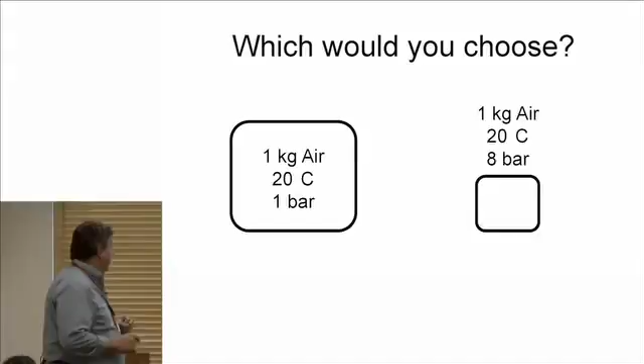As a way to start, maybe we'll start out with a question. Which resource would you choose? I'll give you two choices, two tanks. Big tank, it's got 1 kilogram of air, it's at 1 bar, it's at 20 degrees C. Or a tank where I halve all the dimensions, 2 cubed is 8, so it's at 8 bar, it's got the same mass of air, it's at 20 degrees C, but higher pressure. Which is a more valuable energy resource?

Oh, I love that, hold that thought. Before that, I'll give you a hint: they both have exactly the same amount of energy. Air under those conditions is an ideal gas, and the internal energy is a function of temperature only, so they have the same energy inside both.

Which would you rather have given where you are? The 8 bar, you'd rather have the 8 bar. Why would you rather have the 8 bar? I live in a 1 bar environment, so I can utilize the difference. Well, how would you utilize it?

Take the air and run it through a turbine. Yeah, that would be a great way to do this. What if you live in an 8 bar environment? Take the 1 bar, what would you do with it? Same thing, went the other direction.

You're banned from answering questions. Okay, all right, okay, we're fine.

I'm going to take the 1 bar tank and change it to methane. Which would you rather have? Where's my bar? You live here.

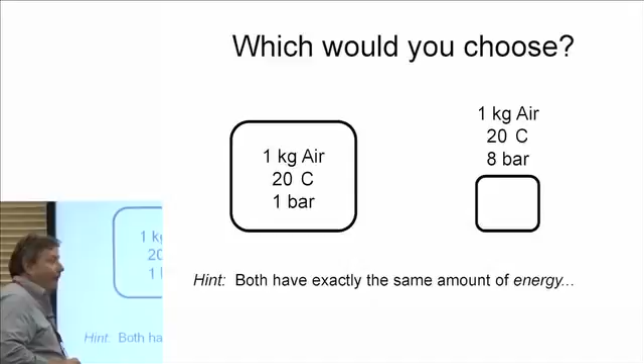Take the methane. I'm going to take the methane and start diluting it with air. I'm going to keep diluting it with air. All right, forget that one. I'll put the methane inside that tank.

We've got the 8 bar environment. I'm going to change the environment to a planet that's at 8 bar, and the environment's made out of methane. Which would you rather have? You'd rather have the air back at the 1 bar.

Okay, so there's a couple of things. Your point, you took my thunder right from the beginning—not that it's great thunder. The ability to get work from a resource depends upon the resource and the surroundings that it's in, right? So the idea that you probably got somewhere along in high school that energy is the ability to do work is just not correct. That's not what energy is. That's actually what exergy is, right? And it's a property both of the resource and the surroundings in which you sit.

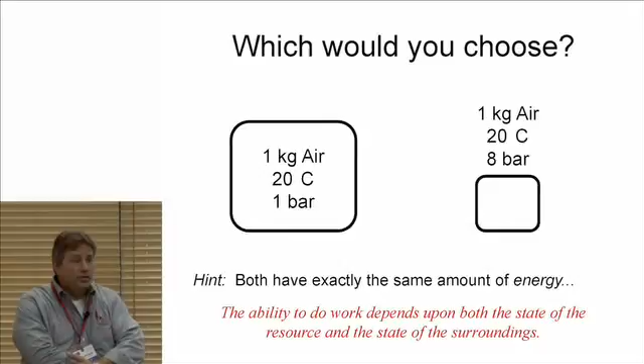Not too surprising. Okay, Richard, were you looking at my slides? Okay, so I've been preempted on this thing, but I'm going to give you a few definitions. In terms of assumptions, I'm going to assume that you know thermo, or that you had it once upon a time. This is a tutorial, and it's a tutorial on exergy, so I'm going to show you how to derive this stuff, and we'll knock a little rust off as we go.

So first, energy is not the ability to do work. Energy is actually a tricky thing to define. Everybody thinks they know what energy is, but if it's not the ability to do work, what exactly is it? You look in a thermo book, you won't find it defined. You go to a high school book, it's defined as the ability to do work—that's wrong. If you look at a college level book, it will say something about the ability to cause change in the world. I mean, it's wonderful and aspirational, and I love the definition. On the other hand, I hate it because it's completely non-technical, so you can't really do anything with it.

So the best definition I can give you: it's the extensive conserved quantity that is interconvertible with heat and work. Now that's a little dry, I know. And you might say, well geez, how do you separate energy from the first law, which is the conservation principle? And the answer is it's not separable.

Work was defined long before energy, in terms of Newtonian mechanics. Heat transfer was defined long before energy was. And it wasn't until Joule came along and said, hey, what about this equivalence between heat and work? And he still didn't quite have his finger on the fact that there was a conserved quantity, and there was a very distinct sign between the two in terms of work could go to heat. Heat could not completely go to work. But there was something in between there that was storable. And so separating the storage from the transfers was tricky.

Well, if that's energy, how about entropy? Entropy is the extensive measure of the number of microscopic rearrangements of energy. S equals K log omega. What on earth does that mean? I have a system, it has a certain amount of energy. If I can go in with that and microscopically rearrange it in omega possible configurations, the logarithm of omega multiplied by Boltzmann's constant—a little 0 point thing that hangs out on the side, don't worry about that—from it, is the entropy.

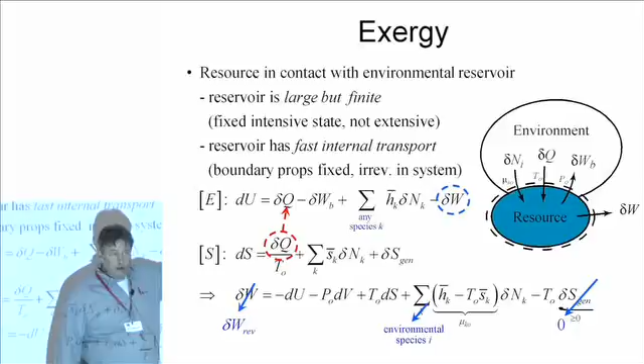But if we do the alternative: I have heat transfer, I have an affected zone that grows in the environment where I generate entropy, and then when my process is done, it will grow back to this boundary, and we attach an auxiliary system onto this, and track it back and forth.

I can do the same thing by imposing the conditions at this boundary and forcing the entropy generation inside my system boundary, so the affected zone has to occur in here. What I'm doing is forcing the resource, whatever system is manipulating the resource, to meet the environment on its own terms, to take the irreversibility inside. You okay with that? It just simplifies the math, but we can do it either way.

Okay, that makes the boundary properties fixed. We force the irreversibility into the system.

If I write the first law for this, for the resource, the change of internal energy goes up due to heat transfer, delta Q, going in, goes down due to boundary work. If it pushes against the environment, I'm losing energy from it, delta WB. It goes up due to transfer of species, delta NI, a small transfer, mole number NI, species I, going in, carries an enthalpy per mole, H, and it goes down due to the work that I'm going to take out of the system. You okay with that?

Not okay with it? Because you're skipping steps. There's no step skipped on that balance.

Well, you brought in enthalpy in the energy balance, and you never defined enthalpy and why it's enthalpy. Oh, come on, you know what enthalpy is.

No, so the predicate statement is isothermal. So enthalpy is U plus PV. It's the transfer of energy with matter, right?

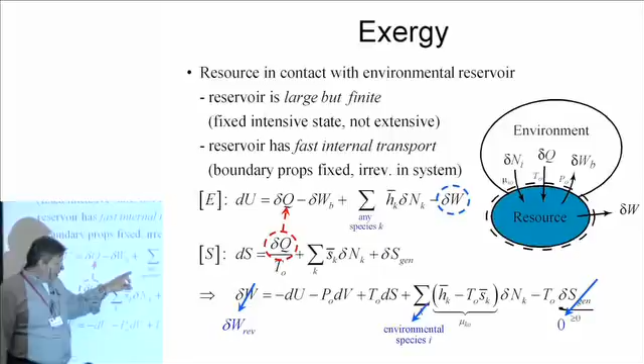Okay, I'm going to make one more shift. The one more shift is, rather than saying any species K, I'm going to say that I only get to transfer environmental species with the atmosphere. And the reason for doing that, I mean, you know that I could, so what are environmental species in the atmosphere? Oxygen, nitrogen, argon, helium, water, CO2, things that naturally occur in the atmosphere.

You know that I could transfer tungsten, all kinds of crazy things, right? Would it be a good idea?

Probably not a great idea to do. I'm going to restrict this to environmental species because it will make it mathematically easier. But for those who want to do it the other way around, first I'll tell you how you do it. And second, I brought a paper which derives it the other way around for arbitrary species.

The short version of the story is that if I have something that is not present in the atmosphere already and I transfer something to it, the chemical potential I transfer to is negative infinity. That makes it a little tricky for the math. But that's actually an integrable singularity, and the back side of the paper integrates that. So we'll get to exactly the same place, but it's a bad idea to take species not in the environment and transfer them to the environment. So for now, I'll make it mathematically simpler and do just environmental species across it. We'll get to exactly the same place at the end.

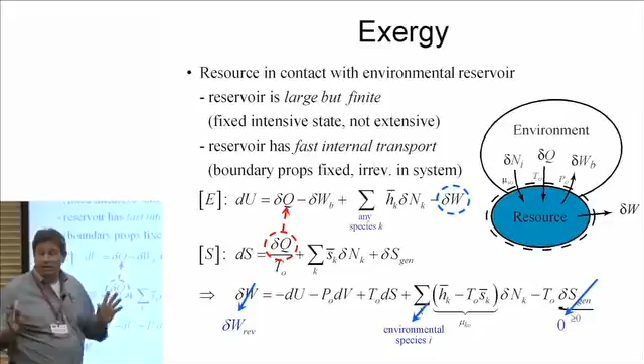So I've got this resource, and we were thinking about this as being a tank of methane. I've got this thing of methane. I want to know how much work I can get out of it. Well, the methane, we choose something crazier, isooctane, right? We should not have isooctane in the atmosphere. Well, you could debate about methane in the atmosphere, right? Natural sources for that. Isooctane should not be in the atmosphere.

So in order to do this, I need to react reversibly, because I don't want to have entropy generation. It'll cost me work. I need to react that isooctane reversibly to atmospheric species. Now that's not that tricky, right? The carbon should go to CO2, the hydrogen should go to H2O, naturally occurring species from it.

So what I'm going to need is a chemical reaction that will transform all resource species J to species naturally present in the environment I, whatever they may be. I can do that by writing a transformation reaction. If this is my J species, this is isooctane, by some stoichiometric coefficient, isooctane plus some amount of oxygen, making CO2 and making H2O. A plus B goes to C plus D. Just a generic reaction. A generic transformation to environmental species.

That's the key. If I rearrange that, we sometimes do this to make things more general. We'll do what are called signed stoichiometric coefficients. I'm going to take this partner reactant, whatever it may be that I need to make the transformation, and put it on the other side of the transformation arrow with a minus sign, because it's now on the wrong side of the transformation. So isooctane goes to negative B oxygen, however much oxygen I need, goes to the amount of CO2 I make and the amount of H2O I make. It's a way to do general bookkeeping.

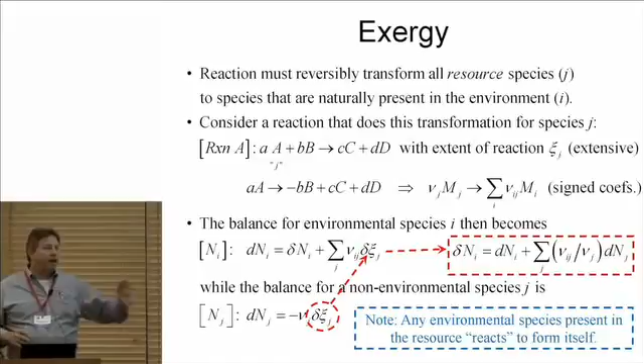Okay, so this is what we got. Small amount of work, differential amount of work, reversible, so the best I can do, comes at the expense of internal energy, can't get at the boundary work, might get a freebie for heat transfer.

I can get a freebie from chemical potential of species that come from the atmosphere into the system that are drawn in. So my isooctane will draw oxygen from the outside world. I get its chemical potential, I get to use that. That's available to me. And then the same thing will be true for all the species that have to disappear - they will make, by the ratio of stoichiometric coefficients, an additional amount of atmospheric species, either to discharge, I'll have a minus sign, or to draw in, I'll have a plus sign.

Now the neat thing about this, the right-hand side is all exact differentials with constant coefficients, so I can integrate it, and I can choose any path that I want. So this is an important thing in thermo.

I don't know if you remember this or not, but exact and inexact differentials. The little squiggly D's, the delta N's and the rest, those are amounts. Those are inexact transfers, and I have to have a prescribed path to integrate those functions.

So work is something that you do, not something that you have. We never talk about a change in work. We talk about how much work you do, and I would have to integrate along a path of doing work to figure out the total amount for that. Whereas energy, I go from here to here in terms of energy. I can do it a whole bunch of ways, but if all I want to know is the difference in the energy, I don't care if you did it by heating, by cooling, by squeezing, then cooling again and doing something else. I just care where I was at the end.

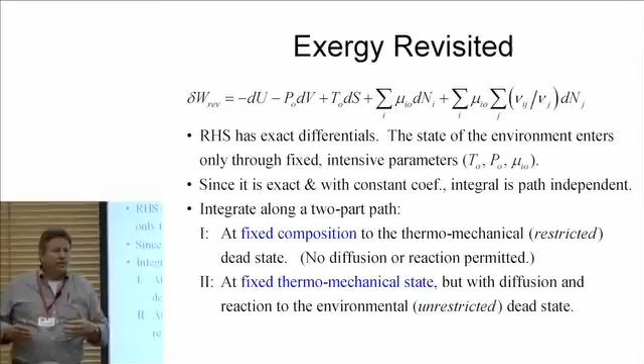We'll take it to the thermomechanical, or what's called the restricted dead state. Dead state is a term for when the resource gets to the conditions of the environment. When it's at the conditions of the environment, you call it the dead state. You've taken everything you possibly can, and it's equilibrated.

So we'll take it to thermomechanical, temperature and pressure of the environment, but no reaction. Then separately, at fixed temperature and pressure, we'll do the chemical reaction part. This will be called the thermomechanical exergy, and that'll be called the chemical exergy.

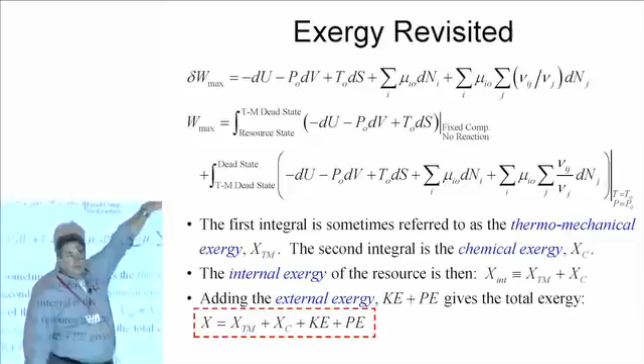If we do that, what we've basically done is broken it up into two integrals. First, from the resource state, what it originally is, to the thermomechanical dead state at fixed composition with no reaction - no reaction means no change in mole numbers, so these two terms are gone. Second part, from thermomechanical state to the ultimate dead state, we'll do the whole thing, but isothermally and isobarically at the conditions of the environment.

So thermomechanical exergy, X. Nobody agrees on what to use for the symbols for exergy, so I tend to use X - it's the most generic thing you can think of for exergy. So we'll have a thermomechanical and a chemical part, and the internal exergy of the system will then be the sum of the two. So it was an artificial separation due to the integration path.

But don't forget that there's also external or macroscopic exergy from the conservative forms of energy: kinetic energy, potential energy, those that are completely convertible to work. And all the versions of potential energy, not just gravitational - electrostatic, any of the forms, strain energy, elastic strain. All of those have to be included. So our exergy will be thermomechanical, chemical, and any conservative forms.

Thermomechanical: we'll go from the resource state to dead state, non-reacting. That makes it easy. That'll be delta U, P naught delta V, T naught delta S. So U minus UTM, the original internal energy of the system, minus the internal energy at the thermomechanical state - cool it down to 25 degrees C and 1 bar. The pressure of the atmosphere times the original volume minus the volume of the system at 25 degrees C and 1 bar, still isooctane inside of it, and same thing with the entropy.

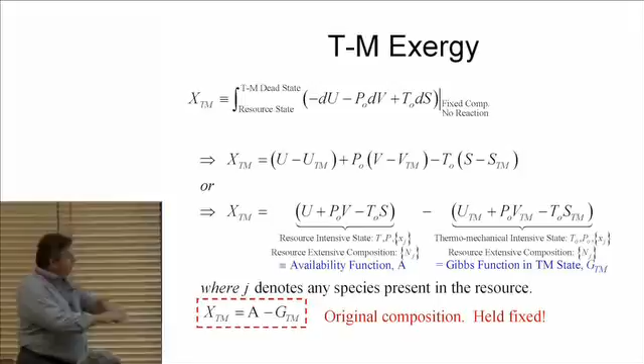If I rearrange that, I can rearrange it into U plus P naught V minus T naught S, which is evaluated at the resource intensive state - the temperature and pressure and mole fraction set of the original resource, whatever it is. The extensive composition is the original set of mole numbers. This is extensive - these are big U's and big S's and big V's. And this is called the control mass availability function. That's the MIT designation for it, or A is often used.

On the flip side, we now have this at the thermomechanical state, temperature and pressure of the environment, but the original composition - we haven't let it react. It's the first part of the integral. We have the extensive state from the original mole numbers - it didn't react, original set of mole numbers. So I could write this as being A naught, but in fact it's the Gibbs function - it's the Gibbs function of the resource, but at the temperature and pressure of the environment. So we might as well just call it that.

So XTM is just this A function minus the Gibbs function of the resource at thermomechanical temperature and pressure of the environment, with the original composition held fixed. Okay, here's the trickier part.

The exergy for the chemical part: we're going from the thermomechanical dead state to the true dead state, the reacted dead state, at constant temperature and pressure, but all the terms are in play now. So the first ones are the same - I've got a delta U, I've got a P naught delta V, and a T naught delta S. But now the chemical reactions - notice I put a minus sign, introduced a minus sign in here just to stack up the terms.

Chemical potentials times the change of mole numbers, so integrate the mu_i delta N. Same thing down here: mu naught, stoichiometric coefficients, and the difference in mole numbers - mole numbers that I have for species J in the thermomechanical state versus what's left over after all this is done.

Okay, if I group that together again, I'm back to the Gibbs function in the thermomechanical state. I have this interesting thing in that I have the environmental intensive state, T naught, P naught, and the composition of the environment, but I have a little bit of a problem. I don't know how many moles of each species are still inside of my system boundary.

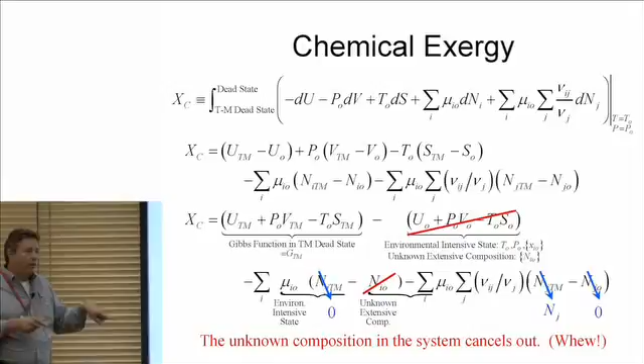So that's problematic. But when I come back down here, that's the same term. That unknown mole number set times that chemical potential is that term. And the equations tell you I'm irrelevant, cancel me out. That's the great thing about the abstract analysis - the equations, the logic, are your guide. So those terms cancel out, which is good. And we say, whoo.

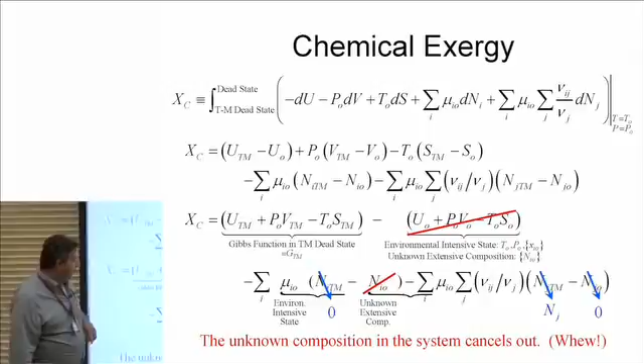Okay, what do we have left? This is the mole numbers of environmental species in the thermomechanical state, but I took all of those and made them all react, even if they react to themselves, so they're all in the J's. So this is just the set of NJs. That's the original composition, it's whatever I've got in my resource. And at the end, all the J's have to have reacted - they can't be around anymore because they cannot be released to the environment.

You put all that together, the chemical exergy is the chemical potential of the resource at the thermomechanical state. And this, which looks a little funny, moles of the resource, stoichiometric coefficient ratio between what it will become and what it is, mapping into how many moles of environmental species with their own chemical potential. This is the overall chemical potential of the resource. This is the overall chemical potential of what the resource will become in the environment. So if my isooctane becomes CO2 and H2O, I have to leave behind the chemical potentials of CO2 and H2O at environmental conditions. I can't take that as work.

Note too that in order to do that transformation, if I had isooctane, I had to take from the environment oxygen because I didn't have oxygen mixed in with my resource. I get to draw that from the environment and that contributes to my work. I get more work from leaving a hole in the environment by having drawn in chemical potential of environmental species. That's that resource-environment pairing, right? In fact, you could flip that around - who says you're the resource and you're the environment? That's just who's bigger, or who's more scarce.

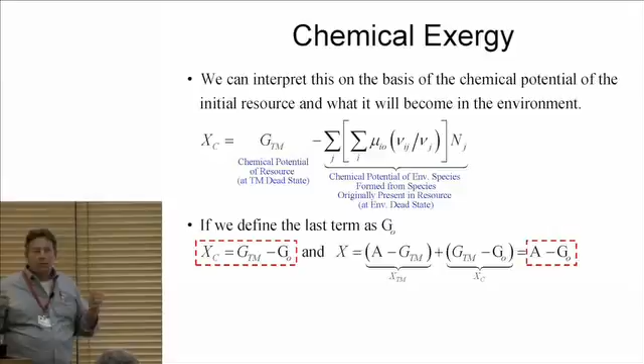Okay, define the last one as script G naught. You can't really write it as G because you got to figure out what the composition is for that. So I'll give it sort of a special symbol, even though it really is a kind of Gibbs function on the back. You can follow that through in terms of definitions. The chemical exergy is the difference between the chemical potential or Gibbs function of the resource before and after it is reacted and diffused to become part of the environment, all at the temperature and pressure of the environment. That's all it is.

So that's not the chemical potential or the free energy change of the reaction? No, no, it's not, definitely not. If I have a free energy change of reaction, I'd be limited to just the stuff inside my system and the products it would come to. I could not interact diffusively with the environment or draw reactants from it. But it's absolutely related—this is a form of free energy.

Exergy, for those of you who know free energy, is environmental free energy. The Gibbs function is the work you can get from a chemical system reacting at fixed T and P, but with no transport reactions, no transfers across. Helmholtz free energy is at fixed T and V.

They're not the only two. If I hold S and V constant, the internal energy is a free energy. If I hold S and P constant, enthalpy becomes a free energy. If you tell me you can make a path where PV to the K equals 17, I can define a free energy for that too. Exergy is literally environmental free energy. Yes, sir?

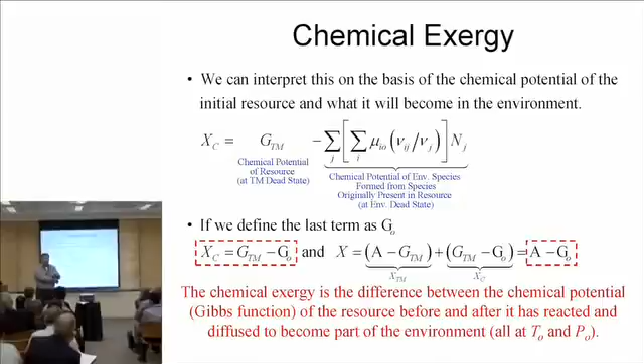Yes, with one additional caveat. If I had a mixture that was stoichiometric or lean, say a combustion mixture, I could use delta G of reaction, take the final composition, and do a diffusive exergy calculation into the environment for the chemical potentials. But let me tell you what you can't do, because people try to do this.

Go to the rich side. On the rich side, you can't do that because you can't use that original delta G—you've got to make all the intermediate compositions from it. Then you have a problem patching it up, saying so much of this gets to react, so much doesn't, and now what am I going to do? So you can get there, but it's easier to get there this way.

But if you're running with excess air, it turns out that the amount of diffusive work you can get out is very small. We'll get there. Okay, so A minus G naught—thank you for that, because it's small but important. Okay, so let me give you a couple of examples, and then we'll take a quick break.

So first, find the chemical exergy of 1 kilomole of methane. I want to make sure you get this right, and that equation is not the best looking equation with all the funny summations in it. So 1 kilomole of methane is our resource—I put the equation up top. The environmental state is 25 degrees C, 1 bar.

My composition: I took 370 ppm—you can tell when I made this slide—370 ppm of CO2, 3% water, so a little below saturation, 20.3% O2, balance nitrogen. My resource, NJ, has only one thing in it: methane. I have 1 kilomole, and I have to transform that to environmental species. Methane will take 2 moles of oxygen, make a mole of CO2, and make 2 moles of water.

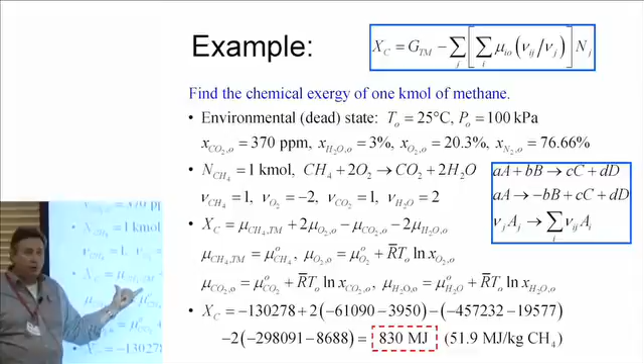Now in that transformation, it's going to get this oxygen from the outside world. That puts a minus sign on its stoichiometric coefficient. So nu is 1, minus 2, 1, 2. My chemical exergy is the chemical potential of methane at the thermomechanical state, pure methane, plus 2 times the chemical potential of oxygen from the environment.

This is grabbing a resource from the environment to do this process, but I have to leave behind the CO2 and the H2O. That's all there is to it. The rest of this: pure, dilute, pure, dilute. Numbers, for those who actually want numbers.

830 megajoules is how much work you could get from a kilomole of methane in the surroundings. On a mass basis, that's 51.9 megajoules per kilogram of methane. Remember what the lower heating value is for methane? Or the higher heating value?

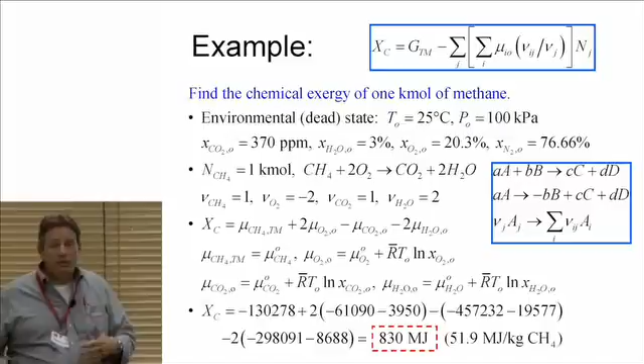It's 50 megajoules per kilogram for the lower heating value and 55 for the higher. The work you could get from this is a little bit higher than the lower heating value and a little bit lower than the higher heating value. This is part of the reason why people haven't gotten on top of it. It's not terribly different, so there's something not so good about using heating values as a metric relative to work, but it's not so glaring that there's a great arbitrage to exploit. Typically, chemical exergy values for hydrocarbons are about 5% higher than the lower heating value of the fuel. Okay, second example.

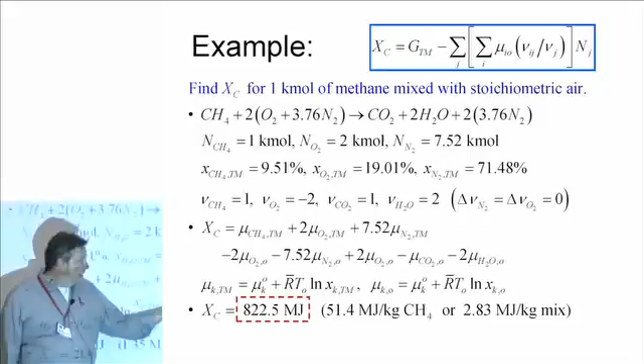It makes you think a little bit about how you want to treat these things. How about if my resource is not the fuel and oxidizer, but the burned products — I burn the stoichiometric amount, so I've got water and CO2 in my system. Now I have 1 kilomole of CO2, 2 kilomoles of water, and 7.52 kilomoles of nitrogen — the exhaust products are my resource. New mole fractions give my chemical exergy: CO2 chemical potential, 2 times the water, 7.52 times the nitrogen, leaving behind atmospheric chemical potential for CO2, water, and nitrogen. These are not the same chemical potentials — in one case the concentration is high, in the other it's low.

This is the diffusive exergy you were getting at before. I still have the ability to do work with the exhaust, because it's not at the composition of the environment. How much do I get? 21.6 — it's getting small. Or put differently, 1.35 megajoules per kilogram of methane, or 2.6% of the chemical exergy. So it's a small, diffusive value — but hold that thought.

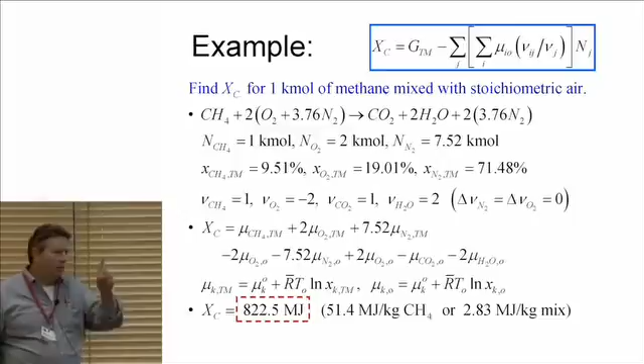What if I do the exergy for 1 kilomole of pure CO2? I let it diffuse into the atmosphere at 370 ppm. How much work can I get? This is reversible, so that's the same amount of work — the minimum work required to take a kilomole at 370 ppm and pull it to be pure at 1 bar, atmospheric pressure and temperature. We may think this is small, but is this starting to sound important to you? My resource is 1 kilomole, no chemical reaction required — it's delta mu between the CO2 state and the environmental state. I can write that in terms of the mole fraction: 19.6 megajoules, or 2.4% of the chemical exergy of the methane.

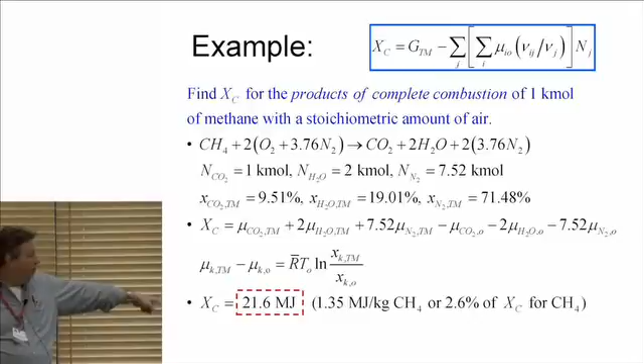How much was the negligible amount of diffusive exergy left in the exhaust? It was 2.6%. What's the minimum work, the exergy required to separate CO2 out of the atmosphere? 2.4%. So be careful before you neglect something, because there's enough diffusive exergy left in the exhaust to separate its own CO2 into a pure stream at the conditions of the environment. If that doesn't make a bell go off in your head about how to design systems where you want the CO2 in its own package, in its own stream, it should.

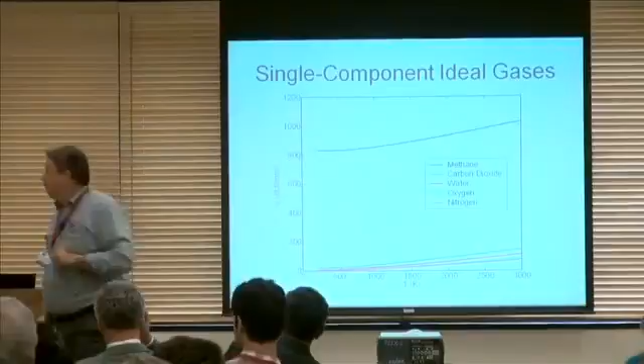On that previous slide, what's the nature of the diffusive energy? Diffusion — just molecular diffusion. In all these cases, you have something that wants to generate entropy; energy wants to disperse. That's the essence of the second law. When you go to take work, the idea is you go along for the ride, and what you do is restrain it in that process, and that restraint absolutely requires work. That's the essence of the Gouy-Stodola theorem.

The abundance of species in the exhaust — that change in distribution has enough exergy to separate its own CO2. Now, that was methane, right? Can anybody see what's special about methane? A huge amount of water. So the chemical potential of that water diffusing was enough to separate its own CO2.

What if I do it for propane? Not quite enough. What if I leave the temperature of the exhaust not at 25 degrees C, but warm it up to 50 degrees C? Then it's got enough. Okay, let's take a 5-minute break.

It's not just a matter of valuing resources. The interesting part will actually come not just from valuing the resources, but from tracking this through your energy system to see every step of the way inside your system what you did to the resource. Because if the potential is gone, I don't care what you do downstream.

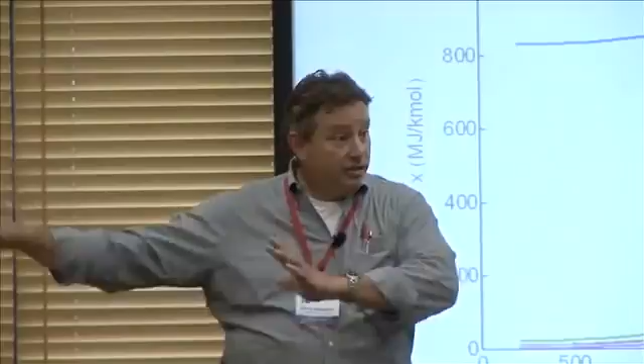You can stack however many machines you want later on inside of it, and the energy is still there, it's still conserved, but the ability to get work out of it has been destroyed. So this is going to turn out to be a very nice metric for thinking about how to optimize energy systems. That really is the key.

So a little bit before that, getting a feel for chemical exergy. So methane, a significant chemical component, we calculated it at the thermomechanical dead state over here, goes up with temperature, but you can see most of the bang for the buck is in this chemical reaction.

If we look at the various products, so these are pure, so CO2, water, oxygen in the atmosphere, but the atmosphere has lots of nitrogen, so nitrogen is not very valuable. Water is more valuable. So it all depends on how much I have.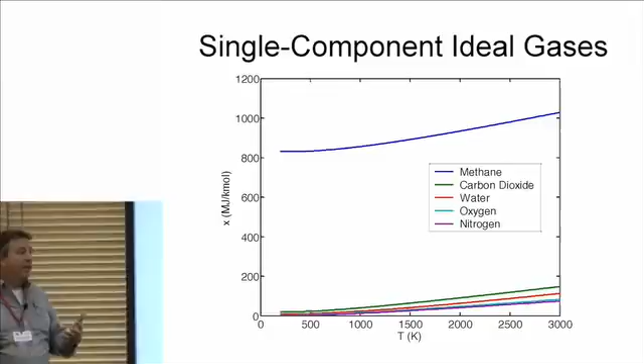And then if I raise the temperature and the pressure, this is all at atmospheric pressure, then they become more valuable. I pump up that thermomechanical component of the exergy. If you make mixtures from them, so stoichiometric methane air, the products of stoichiometric methane air, and this was what we just looked at, neat carbon dioxide.

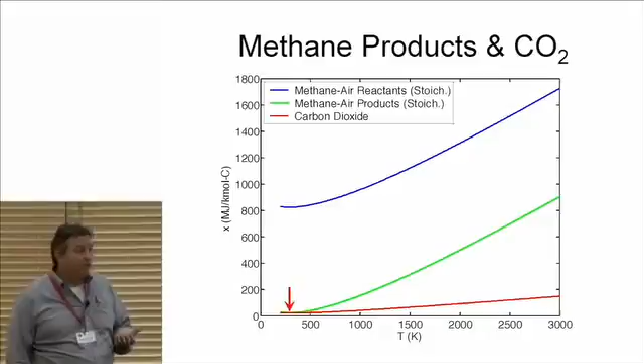And the fact that these cross, so that you really do have a small amount that's diffusive, that last piece, but that small amount is the part that we're fussing over and trying to do CO2 separations out of exhaust. So be careful of what you neglect.

We'll skip propane air, not that much fun, propane air products. This will get to the question about delta G of reaction.

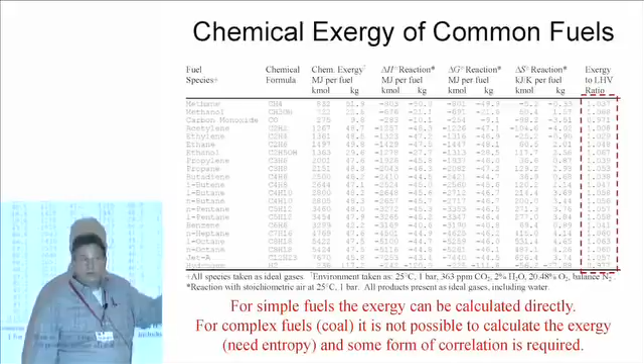So this is just a table, various, mostly fuels in here. The chemical exergy in kilomoles or in kilogram with a specified dead state down here, in comparison to delta H of reaction, delta G of reaction, delta S of reaction, a bunch of things that you would traditionally calculate and might have tabulated. And the point I really want you to take out of this is that the ratio of the chemical exergy to lower heating value for most hydrocarbons is about 1.05.

Now, if we talk about CO and we talk about hydrogen, it's 0.97, so a little bit on the other side. But it's not terribly surprising that we haven't had a great failure in the marketplace by using heating values for figuring things out, right? There's a reason why that's been okay.

But what I would suggest has not been good is knowing that we evaluate engine efficiency based upon work per unit of heating value, that everybody kind of loses their orientation because they don't really think that's a good comparison to be making. Work per unit of heat, and it's not even heat at the equivalent state that I'm running the engine.

So it tends to lead to disorientation about what you should do. What this is telling you is that the efficiency you should be striving for based upon lower heating value is 105%.

Now that's not a violation of the first law. It just means we use a silly metric in the denominator for the definition of efficiency. We use lower heating values.

But what it resets is instead of saying, gee, I've got a 35% efficient SI engine, I'm making an HCCI engine that I think I can get to 40, I got a diesel that's running 42, it's running 45, it's running 48.6% over there, we're only getting up to the halfway bar of being a good engineer because the bar's at 105. We've got more to do.

And everybody doesn't want to buy that. They say, well, but you've got chemical reactions, you're going to generate entropy, it's really hot. It's in there, it's already there.

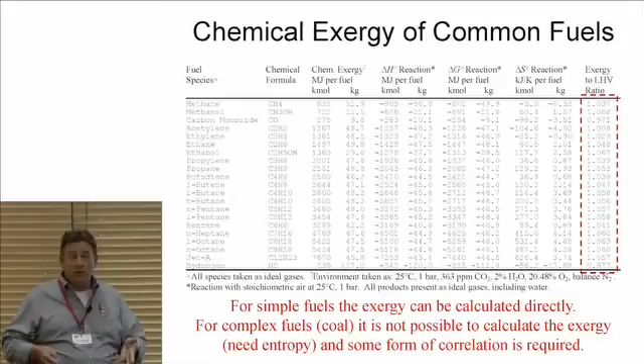Complex fuels like coal—you can't get the entropy for coal directly, so you do it by calculating equivalent mixtures with ideal solution assumptions. It's messy and ugly, but you can work it out reasonably well with correlations, though it's not nice. For pure materials, you could measure entropy or free energy from electrochemical cells, but you can't do that with coal—the inhomogeneity kills you. So there's a little bit of wiggle room in coal and biomass.

That was supposed to be the break.

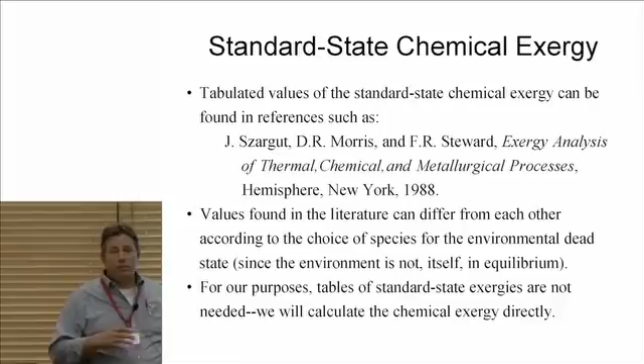Okay, so that was all about calculating, assuming you had all the properties and could handle it. If you don't, there's something called standard state chemical exergy. If you work less in combustion and energy systems and more in the earth sciences world, where materials get really complicated, the dead state is the lithosphere—that gets tricky. This is a convenient way to go: standard state chemical exergy and the effective activity from that. Those you can find tabulated in places like Szargut, Morris, and Steward. So that's the other approach you'll see. For most things you do in the world of energy, you can calculate this directly—you don't need tables, you don't need to look this stuff up. It's easy to handle.

Okay, balances. Exergy is just a quantity—there's nothing special about this. Most of the time when you talk about exergy, there's this question of whether it's a property or not. It's a property of the system and its surroundings. If you think about what happens when you use data for any system, you have to set reference states for that data. If you're doing a chemically reactive system, which enthalpies of formation are going to be zero at 25 degrees C? Are you going to honor the third law of thermo, where entropy goes to zero at 0 Kelvin? By the time you put numbers in, you have to specify external references. So the idea that you have to specify an environmental state isn't really tricky. If you accept that, then it's a property, and you function with it just like any other property, any other quantity. You write balances for it.

So, definition: exergy has external or macroscopic conservative forms of energy—kinetic and potential—plus the internal parts. This is the same thing we do with traditional energy, an internal part and an external part. If I write it in terms of kinetic energy Ke, gravitational potential energy, and the A function we just found, the script G function—if I write a balance, it's a statement of logic: the accumulation is what comes in minus what goes out, plus that which you produce minus that which you destroy. True of anything, just a statement of logic.

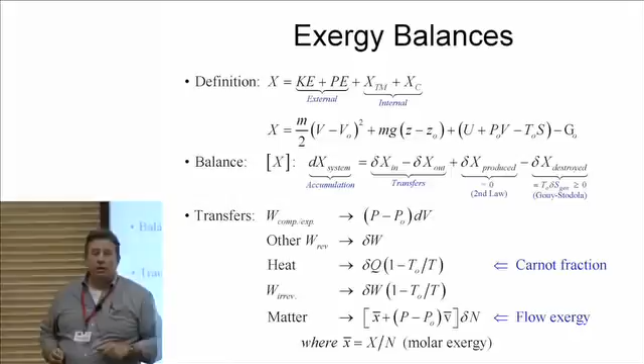This is the same thing as going from U being the energy in something to H, U plus PV, being the transfer of energy when you push it across a boundary—except it's P minus P naught times V, because there's an atmosphere there that you're pushing against. When that P and P naught combines, the U plus PV becomes an H, and you get H minus T naught S, which would be the flow exergy that you've probably seen somewhere. It's just part of writing the balance.

I'm a bit confused first. Yeah, so for Galileo, when it's going through, the system knows only V minus V0. Right? Yes? Therefore the kinetic energy will be V squared minus V0 squared, or V minus V0 whole squared? No, it should be the difference between the two kinetic energies.

But from a Galilean point of view, there is—let's set aside rotating—and in the local version of this thing, it should be the difference of the two kinetic energies. We'll talk about this later.

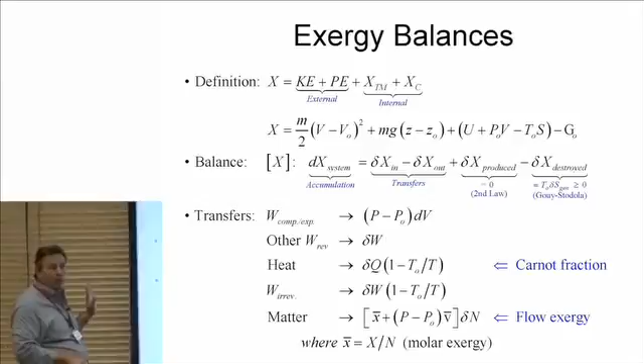Okay, anything else on balance? Yes, sir, what's the V bar down there? Molar volume, so specific volume per mole, or volume per unit mole—molar specific volume, mole specific volume.

Okay, let's do an example. Maybe it's an aging example. This goes back to thinking about the hydrogen economy and making hydrogen from steam methane reforming of natural gas. So we want to make hydrogen, we want to store it, and we'll store it cryogenically. If we're going to store it cryogenically, there's an interesting thing that happens—you've got spin on the protons.

So hydrogen in atmospheric conditions is mostly what's called ortho hydrogen. At very low temperatures, it becomes para. So the spin on the protons actually flips between the two states. If you have an equilibrium mixture at room temperature and you do cryoliquefaction very rapidly, you'll end up with something out of chemical equilibrium that all wants to be para—99.5% para—but has a huge amount of ortho. There's a latent heat that sits between those two states, a latent heat of transformation.

So if I'm doing a system like this, what I want to do as I'm doing the cryogenic cooling is, at every step, put a catalyst in there to keep this close to equilibrium, and do anything that requires heat transfer at the highest temperatures I can. The last thing I want to do is be doing it down at 30K.

In fact, this was discovered when hydrogen was first liquefied. They did the liquefaction, said yes, we have liquid hydrogen, left the room, came back half an hour later, and it was gone. It was because the latent heat of that transformation was essentially the same as the latent heat of vaporization. I said, ooh, that's interesting—got something going on. Okay, so we'll take it as an example.

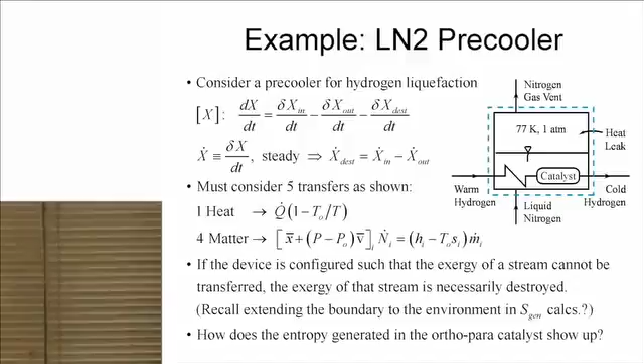And if we didn't include it in this transfer term, if we just took that off, it would just be destroyed. It would show up in our destruction because we'd have that part from the environment included in it.

Okay, question for you. How does the entropy generation in that catalyst show up in this balance? Yes. What will happen?

Yeah, so I'm going to use more nitrogen from this thing. So that's going to show up by changing the amount of nitrogen, therefore the transfer terms into the system and rearrange the exergy balance.

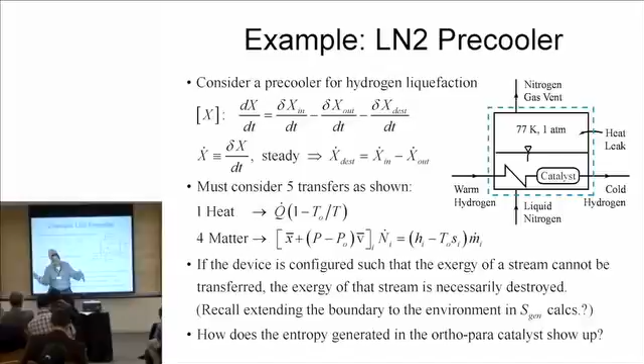Okay, efficiencies. So I harped on this a little bit. I'll try to make it clearer what I was harping on. So you all know the term thermal efficiency, which makes perfect sense if you're talking about a heat engine.

So if we're talking about Carnot or a Rankine cycle, a Stirling engine, it makes perfectly good sense. It's the net work out divided by the heat that you put in. And that's okay, because what you really are doing is a transformation between heat and work. So, I mean, it's not terrible, but it's a little odd, because you're comparing work, which is really valuable and has no entropy with it, to heat, which has a lot of entropy with it.

But in some ways, the metric is capturing that. So it really applies well to heat engines, but it already has a flaw in it, because all heat is not of equal value. We were doing the 2 tanks exercise.

What if I gave you 2 heat sources? I'll give you a megajoule of heat at 500K, and I'll give you a megajoule of heat at 1,000K. Which do you want? You want the 1,000K. Okay, that's already not in there. That's already a problem, even with heat engines.

If we move to chemically reactive engines, it's getting trickier. So what we do is we take that and we try to stretch this by saying, well, let's put a heating value down here. Okay, but now we've got something where the energy didn't come in as heat, it came in as chemical bond energy.

But not all the chemical bond energy was useful. Part of it has sort of an entropic mortgage on it, right? That's what exergy is getting at - the entropic mortgage you have for the energy. So what we've done is we've modeled a chemically reactive engine as a heat engine.

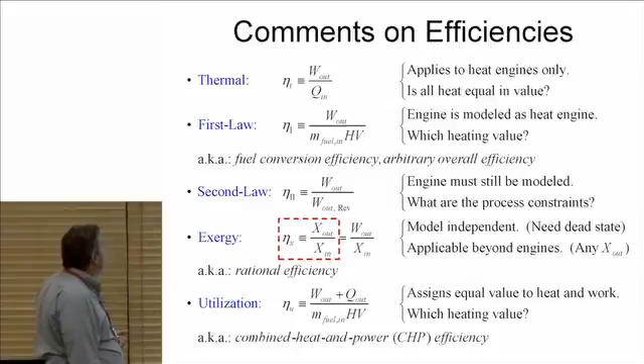Okay, I think we have 15 minutes, is that right? Okay, so that's what I basically wanted to say, but I've got a bunch of examples that you could be interested in.

So things that we could talk about: you know the Weston Hermann exergy resources diagram? You might be interested in that and how you get those things, or how you get solar exergy, for example. This is just a comparison of gas turbines moving to NGCC or STIG cycles and watching the exergy distribution and just how you systematically reason across between them.

Fuel transformations, air separation, a system with automatic CO2 separation, solid oxide fuel cell gas turbines—going towards 70% efficiency, very exciting. Can you ever package it and make it economical, but really interesting in terms of exergy. What you might do in low heat rejection piston engines, thermal barrier coatings inside of engines.

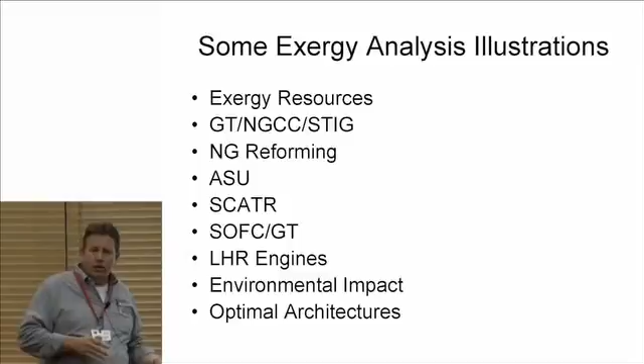The effect of exergy on environment. Since exergy is a measure of how out of equilibrium something is, if something has exergy and I transfer it to the environment, it will drive change as it equilibrates. And so if you think about it, the objective of the engineer who's trying to get every bit of work out of this system is the same objective as the environmentalist. You want to take every bit of exergy you can out as work.

But here's the thing: if John Wyatt were here, he would say, isn't there some point at which it's no longer economic to do that? And the answer, of course, will be true. There'll be some point at which you just can't go after that next little bit. What should you do when you can no longer transform the exergy to work?

You should destroy it. Your mission becomes the opposite mission. Rather than saving every bit and trying to get it into work, once you've decided you can't do any more, you should destroy every bit of the Exergy you can before you release it to the outside. And if you can't, you'll never get to zero.

We can talk about why you can never get to zero. You transform it so that what you release is the most compatible, most easily assimilated transfer of Exergy, which usually means thermal, usually means something warm. Chemical is always the wrong answer for that. When people complain about seeing cooling plumes over towers and the rest and say, 'We got to get rid of that.'

You're nuts. That's a really nice environmental way to handle the system. Well, just get rid of that—you just violated the second law. That's where the entropy goes.

Okay, so that's environmental. And we could talk about optimal architectures, how you use these principles to try and figure out what is the best given a resource and a set of devices. What would you like to talk about?

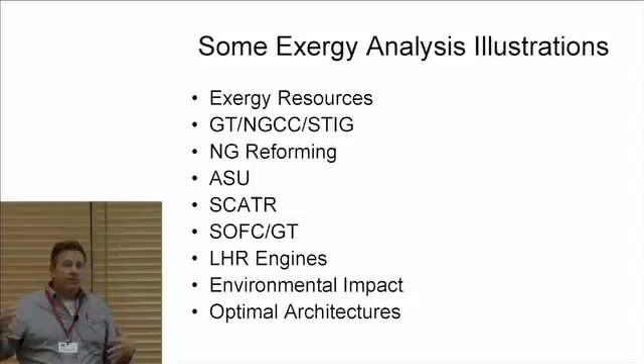You get to pick. All right.

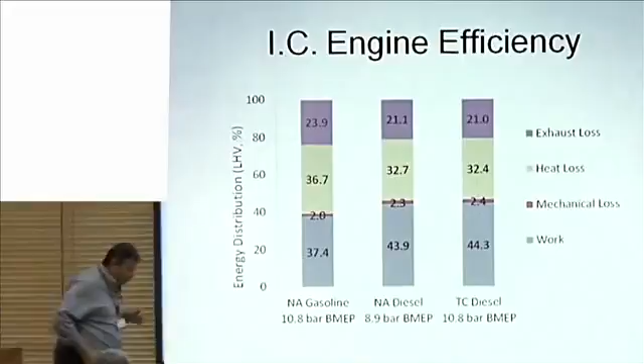Okay, piston engines. So you probably know that piston engines don't have the highest efficiency. There's a couple of parts to this. Everything that I will say will be about wide open throttle, not about throttling the engine, which is being completely ridiculous. I don't like throttled engines. I don't think we need to throttle engines. There are ways to handle that. But if you look at what we have today...

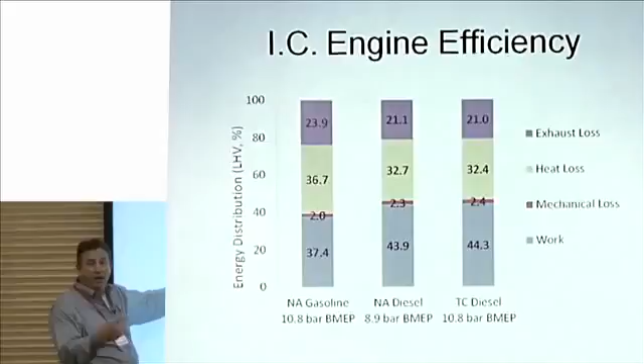This is an energy distribution for a modern canonical gasoline engine. It produces about 10.8 bar of BMEP units of work—we'll produce 10 or 11, typical. If you look at the split of the energy, 37.4% goes into work. This would be like the engine in the Prius; in fact, it sits pretty much right on this point, on the sweet spot in a hybrid.

37.4 you get in terms of work, about 2% in mechanical loss. So we've done pumping, we've done friction, we've included that all, but we split it out. Normally that would be in the heat transfer from it—we pulled it out so you could see it. Heat transfer into the cooling jacket and passive loss radiating off the engine, and the amount that's in the exhaust.

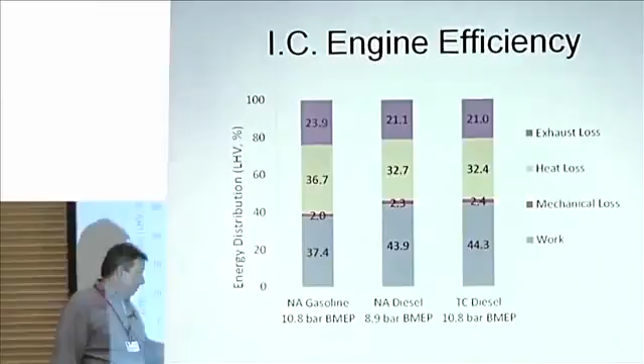If I switch from a spark ignited engine to a diesel, but naturally aspirated, a little higher, getting into the low 40s, coming down on the heat loss, overall leaner in the system, coming down on the exhaust, better expansion ratio, running leaner. If I turbocharge that to bring it back up to this, not terribly different. Okay, that's the energy view.

And traditionally, this is what we've worked with in the engine community. So the old rule was a third, a third, a third. We're a little better than that now, right? A little better than a third, a third, a third.

Let's take an Exergy view. This is the Exergy distribution—same engines, right? Modeled the same way. We're just calculating the Exergy split. Our work went down a little bit, so the efficiency is a little lower, because remember the Exergy is a little higher than the lower heating value was. So 35%. Mechanical loss, heat transfer, exhaust, combustion.

And that's combustion. I mean, if I do combustion adiabatic, complete combustion efficiency, I go all the way either to equilibrium or take the temperature down and go to complete combustion from it. I'm going to incur about 20% destruction of Exergy because I used an irreversible reaction process, and I did it at relatively moderate conditions. If I take it to some slightly wackier conditions, I can cut that in half, but I'm going to leave that off the table for now.

We'll keep compressions sort of reasonable for this. But it makes you think a little differently, right? Because now there's this big pink box sitting at the top that says 20%, and we write it off. So it means that when we start this by saying, well, I can't do anything about combustion, then we're starting out at 80. And now we're partitioning things, and we missed a big box at the top.

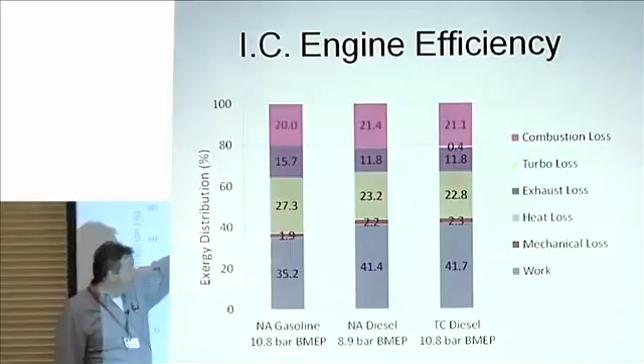Okay, if you do that and you say, well, I don't know what to do about that, and you look at this, this is the one that leaps out. You look at this heat transfer box. And that's really not good, right? We got to do something about that. And that's the idea of low heat rejection engines.

So thermal barrier coatings have been put on gas turbines for how long? 15 years, more? 30 years. I'm off by a factor of 2.

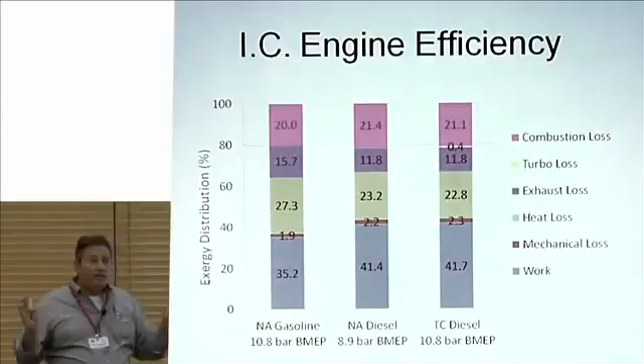We've got to do something smarter because this is thermodynamically nuts. The idea that you're going to put thermoelectrics on the cooling jacket or even on the exhaust system is just not a good idea. Because you have a Carnot cap to begin with, and then you have a ZT figure of merit that typically will put you down at 50%, 40%, 30% of the Carnot cap until you get ZTs that are at least 4 and maybe more like 10. It just doesn't make any sense to do that.

We've got to get rid of the heat transfer. If you look at where the heat loss goes, from the gas to the wall, the destruction—this is the overall split of heat transfer. No, this isn't the overall split, this is the split of destruction.

Gas to wall is 46% of the destruction, wall to coolant, and coolant to the environment. This is important: going from the gas inside the cylinder to get to the wall temperature, half of the Exergy is gone with that heat transfer. Going from that inner wall to the coolant, another 30% is gone. And the last part is in the radiator. So that boundary layer inside, which you're going to have, you just got to cut that flux.

You need to make this go. How do you split this? If you look at where the heat transfer occurs—looking at head, ports, valves, liner, and piston—it's a slightly different impression than you might otherwise have. We always tend to focus on there's lots of liner, there's lots of area. But inside the cylinder, the place where it's hot and the surface to volume ratio is really high is up at the top. That's the place where you really care. The place where the velocities are really high, going through the valves, going through the ports, and you care about the port heat transfer.

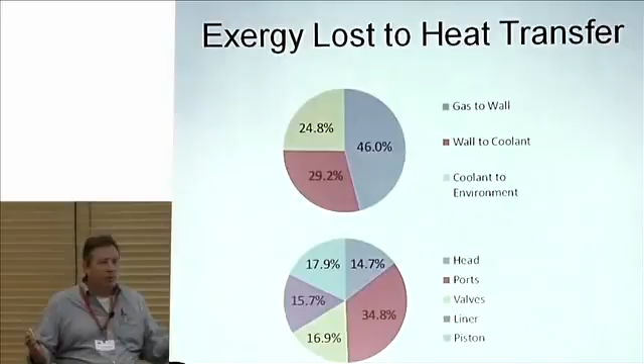But I've never been one to go after 100% of something. I'm always the simple bet: give me half. If you look at this, it suggests leave the liner alone. Go after the valves, go after the head, go after the piston, go after the ports, and use conventional rings, conventional cooling, conventional lubrication down on the bottom end. And so that's what this analysis is.

If you do a low heat rejection engine, the premise is I can't do much about this, but you'll notice where we go, we start eating into it. I really want to cut the heat loss, and a reasonable way to do that is thermal barrier coatings. Think 2.5 millimeters of YSZ, 8YSZ, sprayed on all of those surfaces—behind them, iron, behind them, cooling jacket. So one-dimensional heat transfer there, two-dimensional in the valves because it's trickier moving up through the heads, and model all that. If you do all that work, what you'll find is you can cut the overall heat transfer in half.

It actually cuts the Exergy destruction more than in half, but it cuts the heat transfer in half. Yttrium stabilized zirconia, the stuff that these GE guys spray on everything.

So that's built in tribology into the material? No, no, we're just talking about ceramic coating. On the sides, we're going to keep conventional walls with conventional lubricants, conventional cooling. So no change in the tribology, we're going to let that part of the heat transfer go. Turns out it's actually not that big, so it's not the first thing you want to go after.

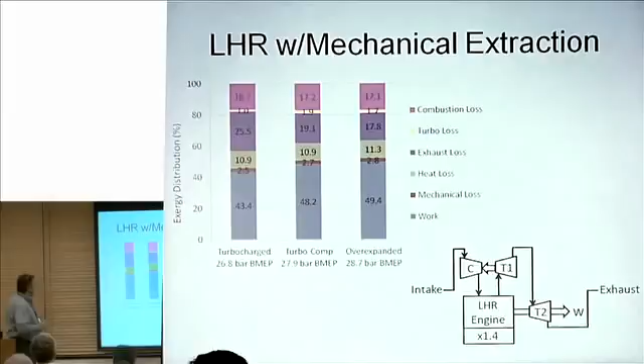If you do that, the last thing you want to do is just make hot exhaust. You have to re-architect the system. If you do an Exergy analysis, it helps you think about what to do. You want to turbocharge because the head's going to get really hot, things are going to heat up. You've got to increase the density, keep the power density up. So first, go after a turbocharger.

43% Exergy efficiency, so you're higher than that on a lower heating value basis, maybe 45 for that. What if we turbo compound? So there's still more expansion in that. First, take care of your breathing, then actually combine it down in turbo compounding.

We're at 48%, we're creeping up on 50%. 50% is my simple answer to sophomores in thermo, saying at what point are you a good engineer? When your Exergy efficiency is greater than 50%, you're probably at diminishing returns. When it's less than 50%, you've got more work to do. Embarrassing, huh? It's embarrassing for me.

48%. If we overexpand it, you might ask, what's better, turbo machinery out here or build a linkage? This isn't quite an Atkinson linkage, it's what's called an EXlink. It's a Honda version of the package, which is really kind of nice. It's compact, and it has 1.4 times the expansion ratio as the compression ratio.

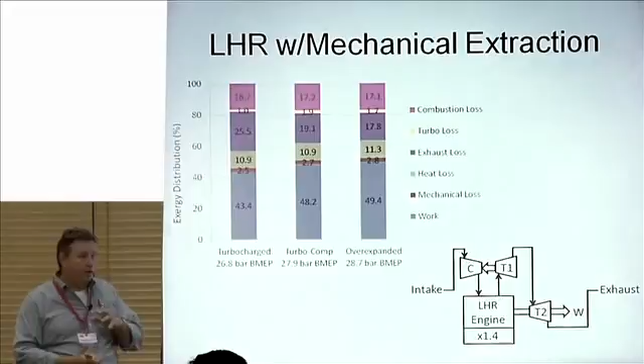The reason why you would care about that is piston cylinder compression and expansion is actually much more efficient. You destroy a lot more Exergy in the turbo machinery than you do if you do it in the piston cylinder. So to the extent that you can package it, you'd rather keep it in the cylinder. If we overexpand, turbo compound, turbocharge, we're nipping right around 50% for that.

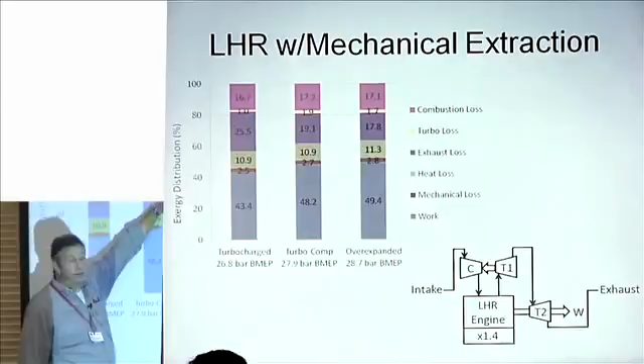Notice the Exergy distribution. We still got some more in here in the exhaust, but we're pretty well running it down in terms of the pressure. So we're running out of mechanical Exergy, but we still have thermal in here. We've been nipping away at this combustion part because we're raising the pressure on this system. We're starting to get part of what we call the extreme states benefit for this.

Is this a diesel engine? This is an engine where the combustion system is not specified. It's a 40 crank angle degree wide combustion profile, and we assume that we can make that profile. That, in fact, is the PhD research of the student, figuring out how to make that combustion process happen.

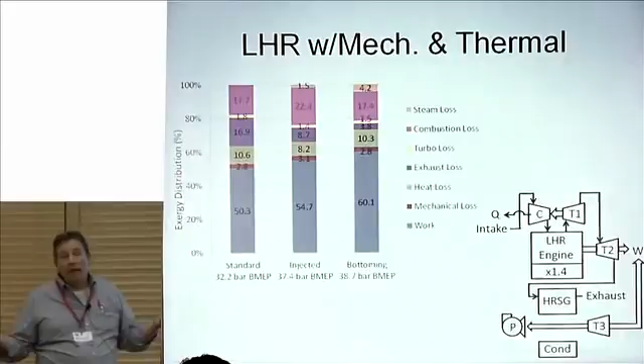If you go further than that, if you play out everything you can in terms of the mechanical part of the Exergy, you still have thermal, you can go after that. You can bottom it, you can steam inject it, a couple of options.

50, I'm not sure which system. This is the steam injected one, this is the bottoming one. You can get to 60. So bottoming Rankine cycle - and you may say, bottoming Rankine cycle, that's crazy, who's ever going to do it? Cummins is working on how to package it on trucks. GE is working on how to package this.

Okay, so interesting, the last thing I wanted to say about this is look at this Exergy distribution. 2.8, I'm down to 10 or 8, 3, 1, 5. How am I ever going to get past 60? Remember, I want 90, I want 90 in 2030. Things aren't looking very good.

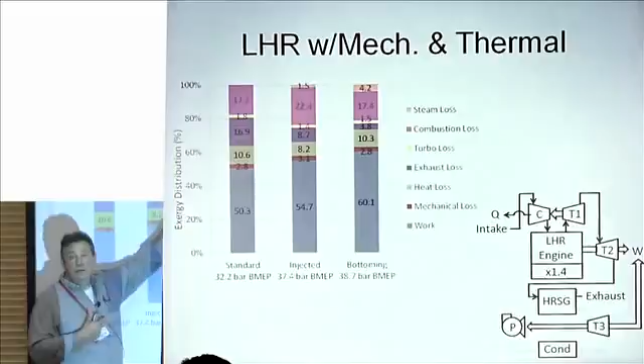I could do a little bit more here. It's combustion, it's the combustion side. So let's look - that's all I wanted to say about LHRs. Let's look at the SOFC, because that might finish off the story.

Yes, let me do the SOFC, and then I'll talk about the... ooh, that's a mistake.

This will help to pick that up, too.

SOFC, gas turbine, steam turbine, or the infamous triple cycle. This got my attention. I've been watching this as academic papers for a long time, interesting papers from academics have gone through for a while. And it was the first one that I noticed: 70% efficiency based upon lower heating value, and it seems credible. So it's been kind of fun to watch, and I've been waiting for somebody from industry to say whether or not you could actually make this.

Does this actually make any sense? So I get the paper study side of it. This is an oversimplified schematic. I'll show you how we actually modeled it.

Natural gas into a solid oxide fuel cell. The air for the solid oxide fuel cell comes off the compressor of a gas turbine. You pre-react in the SOFC, you actually do your fuel transformation in the SOFC. You then combine the anode and cathode streams, finish the chemical reaction up to turbine inlet temperature, expand across the turbine — it's still hot. Run it through a steam cycle, 3 pressure level steam cycle, and make more power.

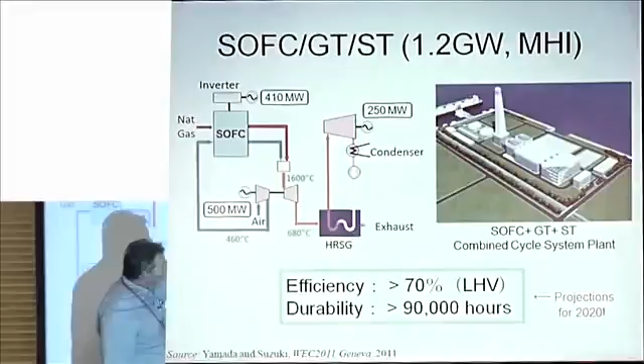Another one of the things I'd been tracking — this is sort of the idea behind the plant. The presentation was at the 1-year anniversary of Fukushima, and we were talking about alternative energy strategies in Japan. So the idea of tankers of LNG coming in and building these energy plants to replace the nuclear plants was the theme. But you'll notice an interesting diagram — I'll come back to that at the end.

This is modeled — this is the work of one of my students, Rebecca Pass. Methane coming in, it says anode recycling on the SOFC, so YSZ and SOFC that's doing the pre-reaction. The air is coming from a split gas turbine, state-of-the-art gas turbine. Coming in through the cathode, we resolve the heat integration inside of it, do a post-combustor from it across the turbine, 3 pressure level HRSG on the backside.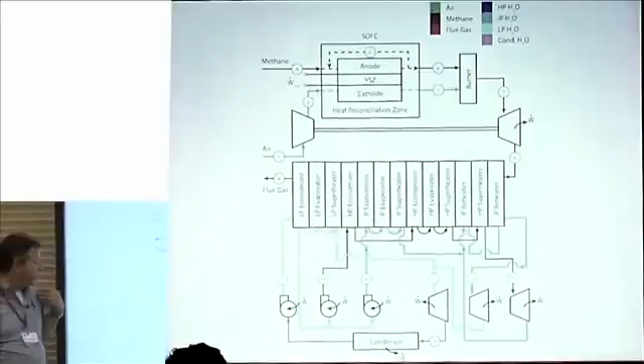Basically our interest in this is what does it mean to get to 70% LHV efficiency in terms of managing Exergy — what is it about this system that's getting you to that number? Given the previous example on low heat rejection engines, overexpansion turbines, thermal barrier coatings and all that stuff, we're capped at 60. To me, that was the big message — I can't get past 60 for that system. And I've got that big old bin of combustion irreversibility sitting up at the top. It makes me go to the other side and say, well, I've got to be more reversible, I've got to restrain the reaction. Let's go look at the system with a restrained reaction.

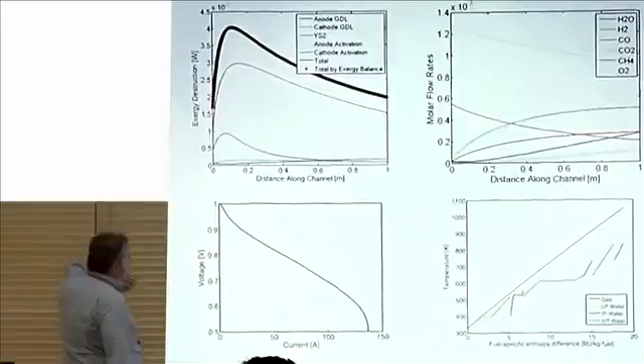So that's what Rebecca did. We model this a little differently than some other studies — we actually do the fuel cell. So we're looking at the Exergy destruction along the tube, along the channel inside the fuel cell, the species along it. Here's the V-I curve for the cell, here's the temperature matching in the HRSG, the pressure levels on that. We do it so that we can exercise it, right — we don't want to just grab data from a study because we'll take it outside of its range and it's not very flexible. And here's the interesting part.

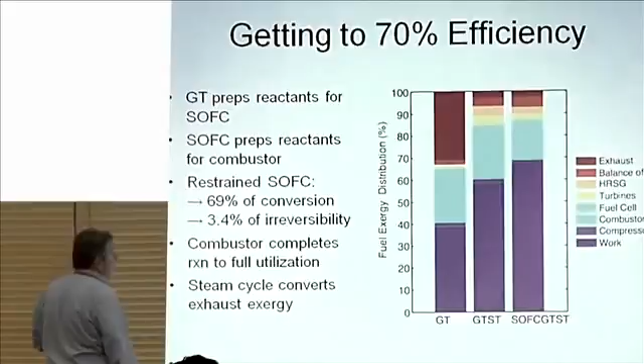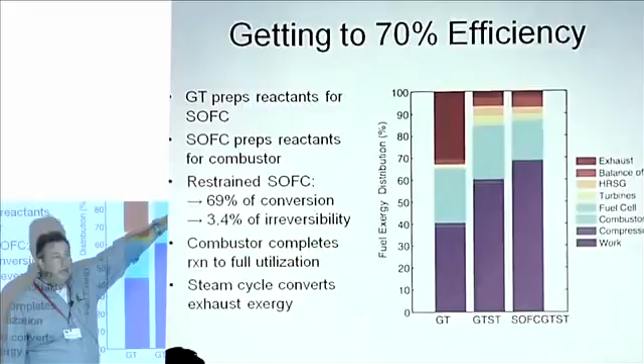If you just look at the gas turbine itself, we're up around 40% or so Exergy efficiency for it. Combustors destroy a bunch, and a whole bunch in the exhaust — not a big surprise. We put a steam bottoming cycle on that, we bring that back down again, coming up to an F-class system, or an H-class system, depending on how you integrate the steam cycles. You go to the SOFC gas turbine, steam turbine cycle — well, we already took care of that, it was this combustion part that shrunk down. If we're going to get to the really high numbers, we've got to do something about that combustion irreversibility. So if you think about this, there's a few important things that happen here: fuel cells are really nice, but they're really fussy about their diet.

They don't like to finish their meal. They don't like high utilization. They like hydrogen to come in. They don't like to go to high utilization. And they're sort of prissy about the temperature, pressure, everything else that you do around them.

Combustion is not fussy about its diet. If you overfeed a combustion process, you can make hydrogen, you can make CO, you can make all kinds of stuff out of that might start to look like fuel that you might want to give to a fuel cell. So thinking about these systems and how you interleave these systems to sort of take care of each other's shortcomings.

But the most important part is to shift some of that chemical reaction, but not all of it, to a place where per unit of reaction that you achieve, you have less irreversibility. And so that's really what we were looking for out of this.

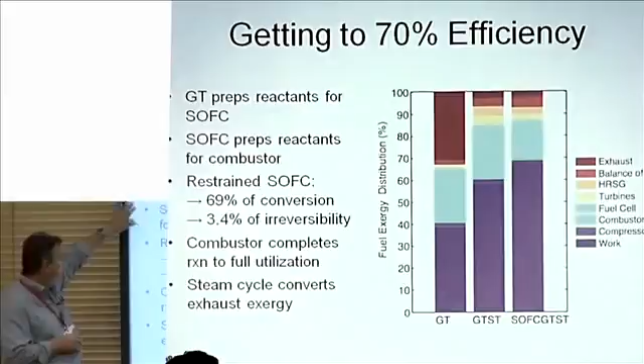The gas turbine prepares the SOFC better. The SOFC preps the reactants for the combustor better. But by moving to the SOFC, 69% of the conversion occurred in the SOFC and only 3.4% of the irreversibility, whereas before in the combustion system, it was 20%. So by splitting and rearranging and not saying I have to be a fuel cell, I have to be a combustion system, let's get the best of both.

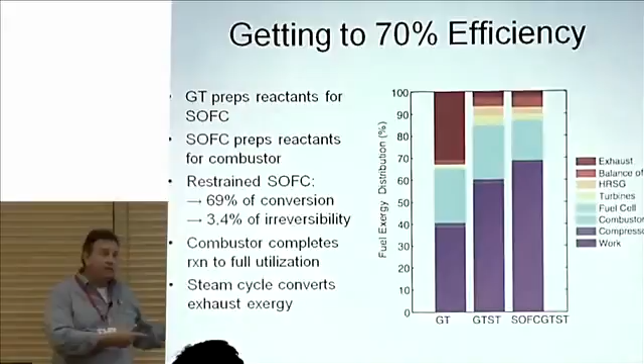You can re-architect systems in interesting ways. The key is to watch the Exergy and just listen to what it's telling you. It really isn't that tricky.

Does that incorporate all of the steam reformation that has to happen on the LNG, or is that a hydrogen-only fuel cell? No, this is natural gas coming in. So it's internally reformed. It's internally reformed and anode recycled.

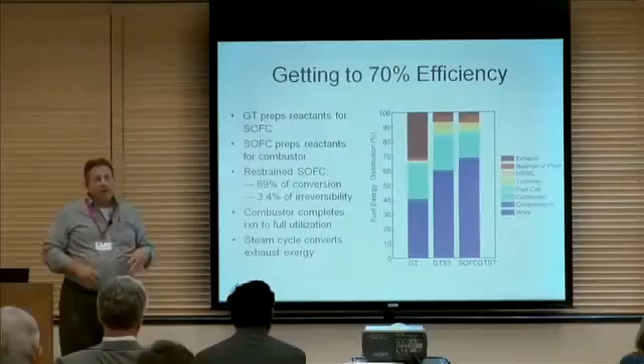So you might have a small pre-reforming stage, but it's got a relatively big anode recycle, and we solve across the whole space of that to figure out where the best place is for it. And you break down the methane as you go to keep the concentrations up as you're moving along the cell. You play all the cards.

The interesting thing for that, and I'm hoping GE is going to make this, is I'm sort of reverse engineering this and trying to figure it out, and looked at this and said, oh, this is kind of neat.

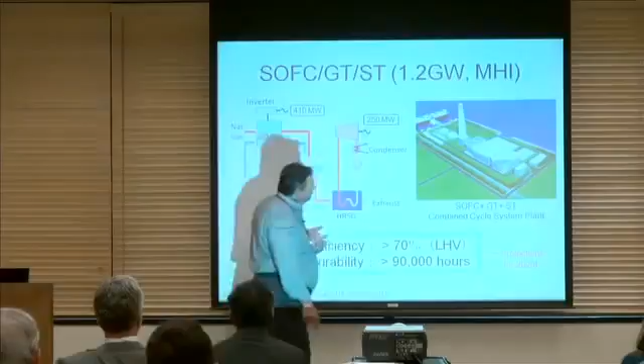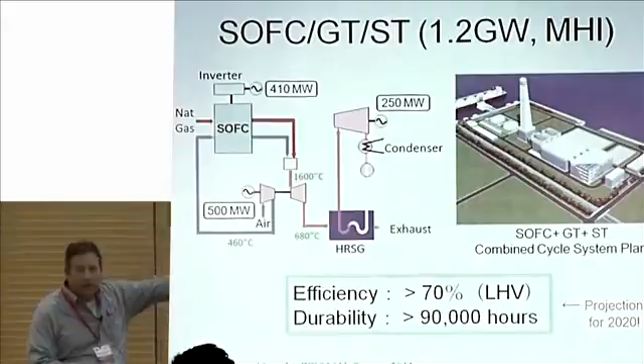So looks like some HRSGs over here. It looks like a stack, sort of a gas turbine building. Then I did a calculation on how many tubes you need and how much space you need to put those tubes in at 23 bar to package this thing. I think that's that front building with the cutaway on the side. So it'll be interesting to see how this happens.

And I hope it does, because we really do want those high efficiency numbers. And I think that may be our path, is to actually use mixed reaction systems for it.

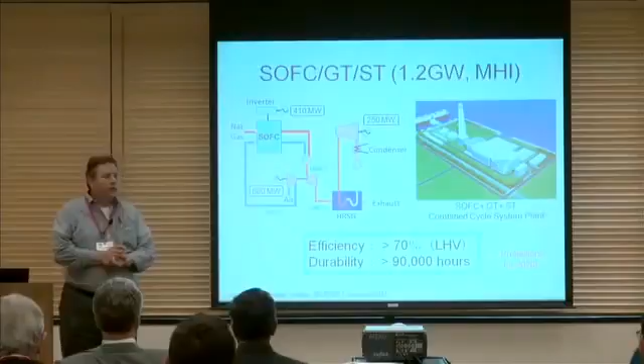Anything else? What do you do with CO2? Yeah, in this particular one, no discussion. But I can show you a system with separated CO2.

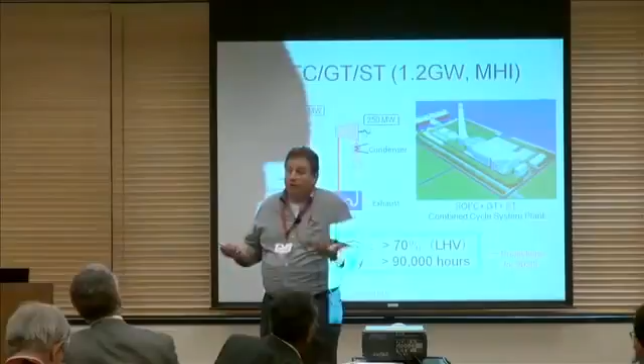Okay, yes sir. How much is second law efficiency actually used in practice to evaluate alternatives? So when you think of certain things, when you talk about compressors and turbines, adiabatic efficiency, isentropic efficiency is second law efficiency. I mean, it's our mainstay for how we evaluate those things.

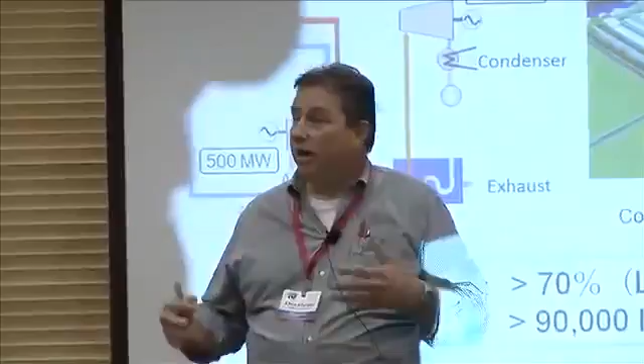When you talk about bigger systems, you've got to pick an architecture, right? A turbine is really simple. Same inlet state, same outlet pressure. That's an HS diagram from it. So it's really easy, it's a simple system. When you get to a more complex system, you've got to agree upon a system, and it has to have a reversible limit. It becomes a lot less useful to you. But Exergy efficiency, you can still do it, because it's about the resource and how you manipulated the resource going through.